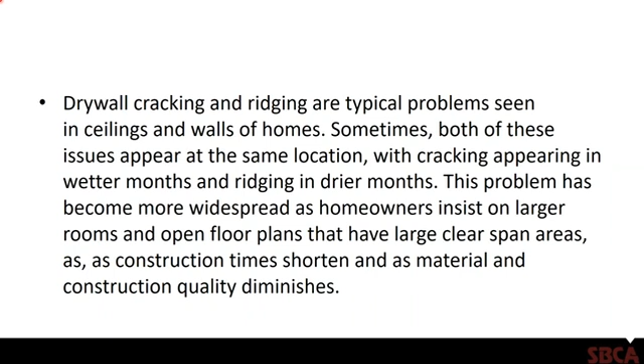Also, to some extent, there's been a decline in the quality of some materials used. In wood, as more plantation-grown wood is used, the effects that moisture has on dimensional stability are significantly greater than with old growth. And also, to some extent, the quality of construction, whether due to ignorance or whatever. So many different factors come into play.

The cracking and ridging are common problems that typically occur along large open spans, and both can occur at the same location, due to alternating periods of primarily high humidity, but also to some extent large shifts in temperature.

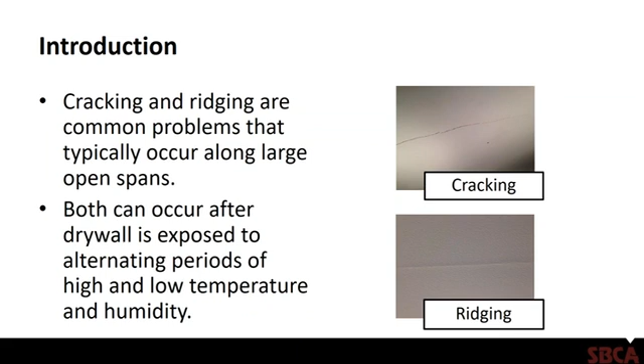Again, we're not going to be discussing gypsum cracking problems typically due to structural deficiencies. The photo on the left shows what you'll typically see if you go out on a job site and see a diagonal crack moving at a 45-degree angle off the corner of a door - that's probably a good indication there's some type of deficiency in the structure, whether it's significant deflection or differential deflection causing that crack.

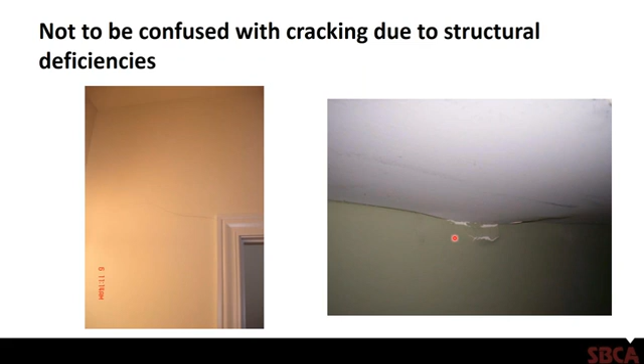The photo at the right is a bearing issue, where a column wasn't installed in the wall where it should have been. Again, structural deficiencies are really not what we're going to be focusing on today.

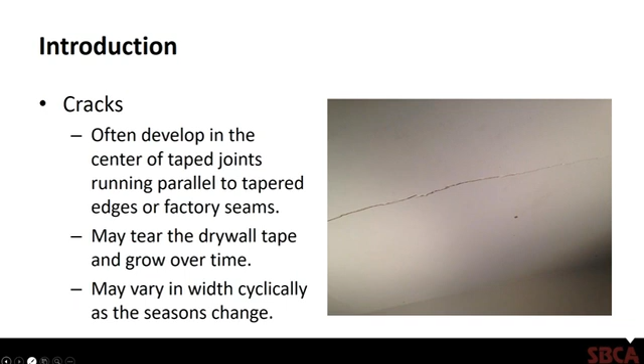Cracks often develop in the center of tape joints running parallel to tapered edges or factory seams. This cracking may tear the drywall tape and grow over time, and it may vary in width cyclically as the seasons change.

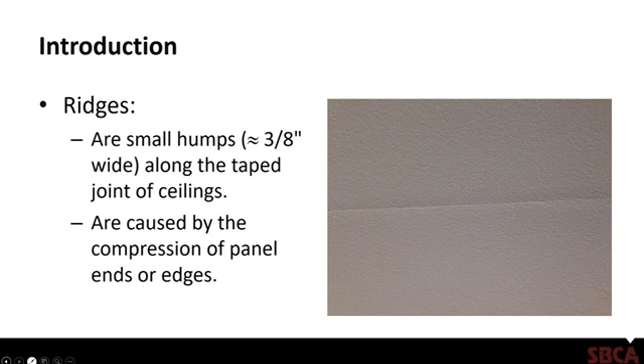Ridges, on the other hand, are typically small humps in the surface of the gypsum, usually a quarter inch to three-eighths inches wide, typically occurring along the tape joints, and are caused by compression of the panel ends or edges.

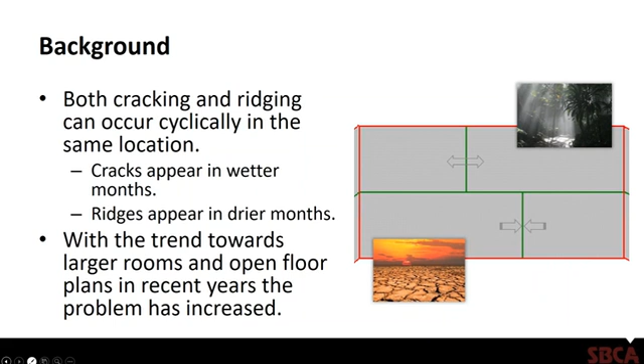Both cracking and ridging can occur cyclically in the same location. Cracks typically tend to show up during wetter periods of time, and ridging typically during the drier months. Again, as we stated earlier, with the trend towards larger rooms and open floor plans in recent years, this problem has tended to increase.

There have been several studies looking into the causes of gypsum ridging and cracking. The first group was sponsored by the Drywall Finishing Council, and they collected data using an electronic monitoring system in two Las Vegas homes. The second group was a joint effort between the Drywall Association of Nevada and Monash University in Melbourne, Australia, where they constructed a framed wall test module, including ceiling and roof structure, within a climate-controlled test chamber, and then varied the temperature and relative humidity over extreme conditions to see the effects.

You'll notice both of these studies were primarily focused on rather arid parts of the United States, and Australia, which also has a large area considered rather arid. The vast majority of reported cases of gypsum ridging and cracking seem to occur in more arid areas of a country, where humidity changes are most drastic from season to season.

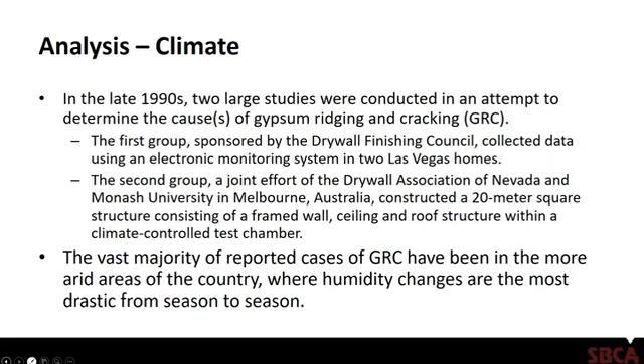The studies basically concluded that significant relative humidity changes are likely the most significant cause of gypsum ridging and cracking, primarily due to differences in behavior of the various construction materials when subjected to cyclical changes in moisture content. Other causes can also include poor framing practices and improper gypsum installation techniques.

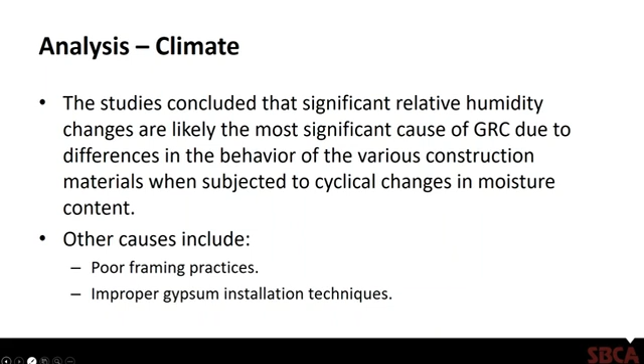In terms of climate, when a residence or building is constructed in the summer, typically at a relatively low relative humidity, and then subjected to an increase in humidity in the wintertime - we're talking about more arid locations, where typically the higher humidity occurs in the wintertime and the lower humidity occurs in the summertime.

Most construction materials are going to take on moisture as the humidity increases, and they will tend to expand. Wood is exactly that way - the framing lumber increases in length to a greater extent than the drywall will. The differences in increased length causes tension in the drywall and can result in pulling the tape joints apart and cracking occurring.

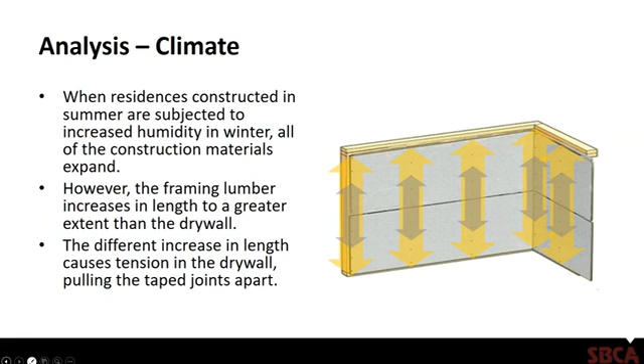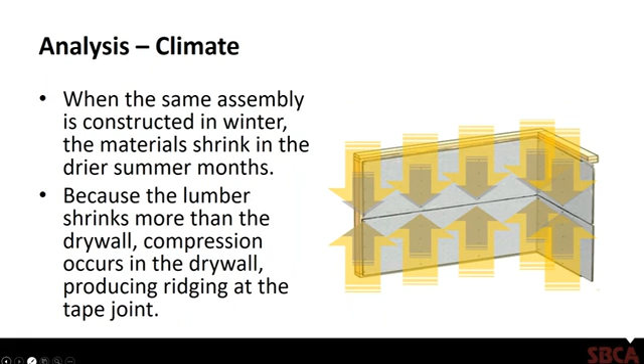The opposite is true when the same assembly is constructed in the wintertime, when the humidity is higher, and then subjected to lower humidity in the summertime and it starts to shrink - again, the lumber shrinks at a greater degree than the drywall. That will force the drywall gaps together, causing the ridging.

Let's talk a little bit about some wood technology as to why moisture effects will change the wood. If we think of wood basically as a series of soda straws - the wood cells - wood is obviously a lot stronger parallel to grain than it is perpendicular to grain.

The chart at the right shows that if these are my soda straws, my wood cells, at moisture contents typically about 30% or greater, like in a living tree, not only are the cell walls saturated with moisture, but you also have free water typically within the cells. Moisture contents can actually exceed 100% in terms of how they're measured. But in a living tree, anything with moisture content greater than 30%, also known as the fiber saturation point, you're going to have free water, and the cell walls of the wood cells are also saturated with water.

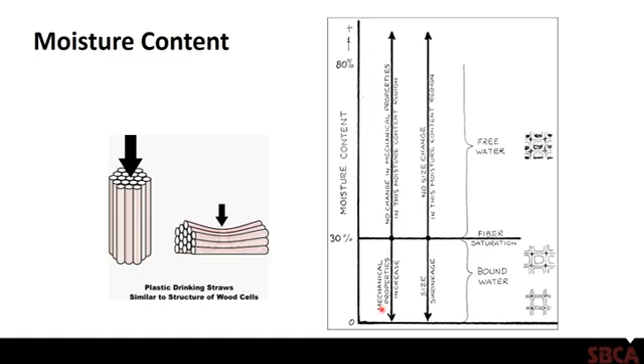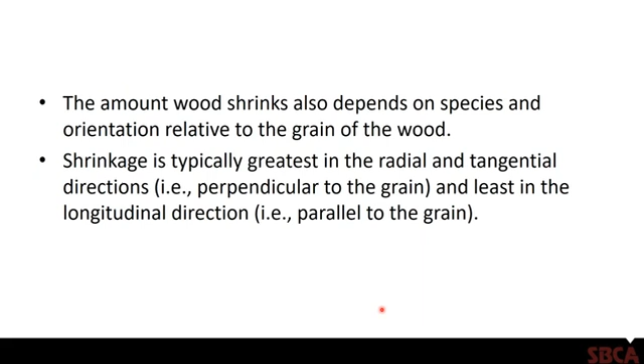Now, the amount the wood shrinks depends on the species being used and also the orientation relative to the grain of the wood. Shrinkage typically is greatest in the radial and tangential directions, or perpendicular to the grain, and is least in the longitudinal direction, or parallel to the grain.

Now, I mentioned a couple of different angles or directions. The radial direction is basically if you start at the pith, which is the center of the tree, and work your way out in the radial direction, so I'm going perpendicular to the growth rings. The tangential direction is basically parallel to the growth rings.

Typically, and again it varies by species, but wood will tend to shrink - its greatest shrinkage occurs in the tangential direction, and that can be anywhere from 5 to 8 or 9% in drying from fiber saturation point down to oven dry, or 0.

In the radial direction, it will also shrink, averaging about 3 to 4 to 5%, going from fiber saturation point, roughly 30%, down to oven dry. And then in the longitudinal direction, which would be in and out of the screen, parallel to the wood fiber orientation, that's where wood shrinks the least.

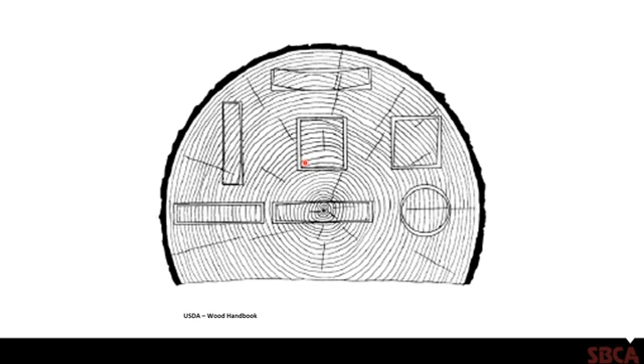When you're manufacturing a truss or buying lumber, you really have no control over how that material is going to get cut out of the log. So you don't know if you've got a radial or tangential cut, or how much of each you're going to have in that piece.

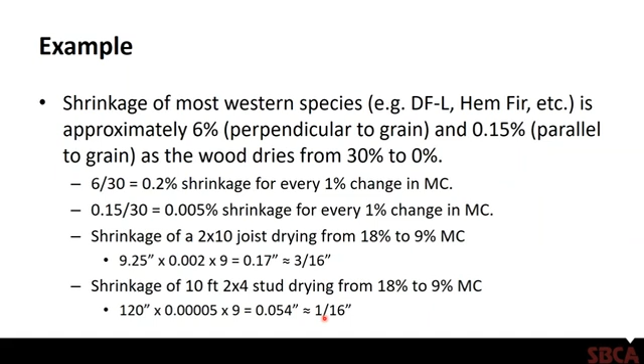As I said earlier, studies basically showed that humidity levels have probably the most significant effect on when gypsum ridging and cracking can occur. However, typically the humidity levels must change by at least 50% and be maintained for 18 to 30 days for gypsum ridging and cracking issues to occur.

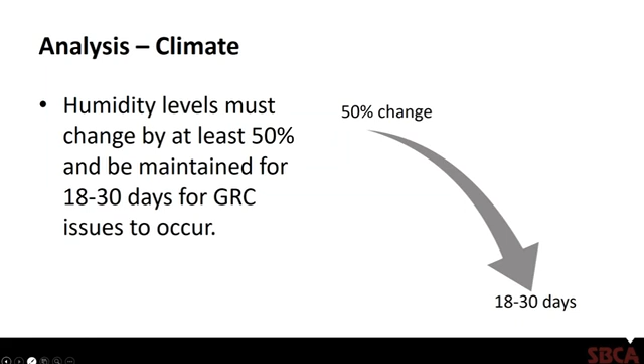What you're seeing here is humidity changes 50% and then is maintained for an 18 to 30 day period. So the relative humidity is changing, and as a result, the moisture content and the equilibrium moisture content of the wood takes time to either expel moisture or take it on, depending upon if the relative humidity is going down or up by 50%. It just takes time for things to start to move and change. So again, relative humidity change of about 50% or greater, maintained over an 18 to 30-day period.

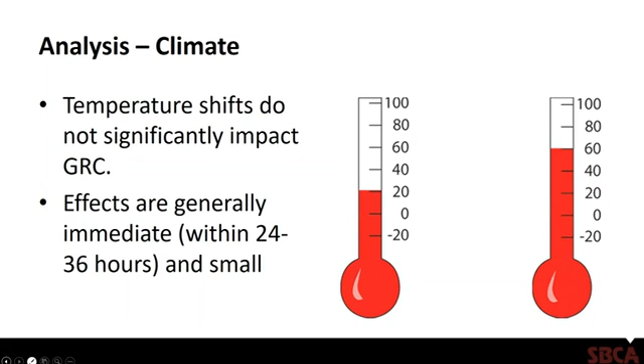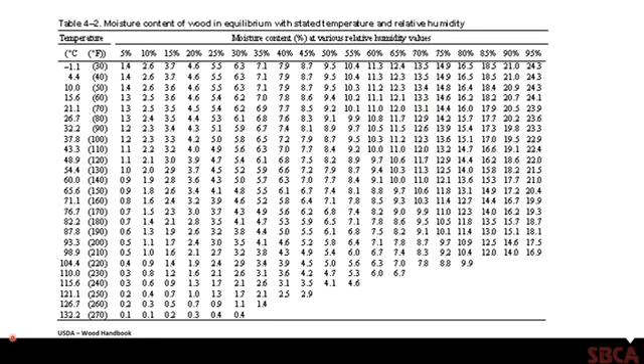However, if I go from a relative humidity of say 20, and have a 50% change, going up to 70, and maintain that over a long period of time, with temperature basically at 70 degrees, I'm going from 4.5% up to 13.1%—so a more significant change with changes in relative humidity.

Other factors that can affect gypsum cracking: in certain parts of the country it's not uncommon to use unseasoned or wet lumber. The reason is that in more arid conditions, the thought process is by the time the lumber gets installed and the building is finished off, the moisture content of that wood is probably going to be down well below 19%. But as we've seen, as that wood shrinks while it dries, that's when you get the more significant dimensional changes.

You can also have misaligned studs and headers around doors and windows. Joints should fit tightly, because as the structure is loaded, any gaps occurring in the framing are basically going to be taken out, and that can cause ridging in the gypsum.

Headers should fit tight against the top plate of the wall or cripple studs above the header. So again, just doing a good job of framing can certainly help mitigate some of these problems.

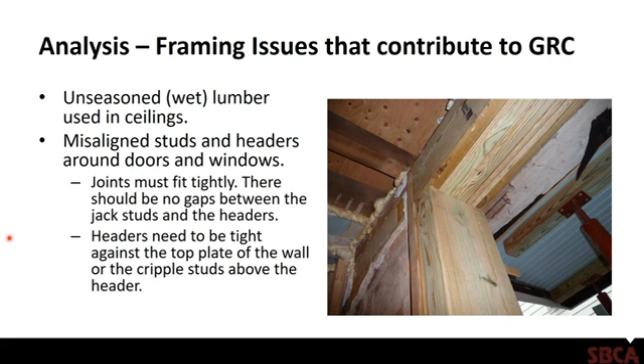Gaps between wall top plates due to improper attachment can cause problems, as can gaps between studs and plates. If you're not using a pre-trimmed stud and you have varying stud lengths by a little bit, that creates unevenness in your wall, which can cause problems.

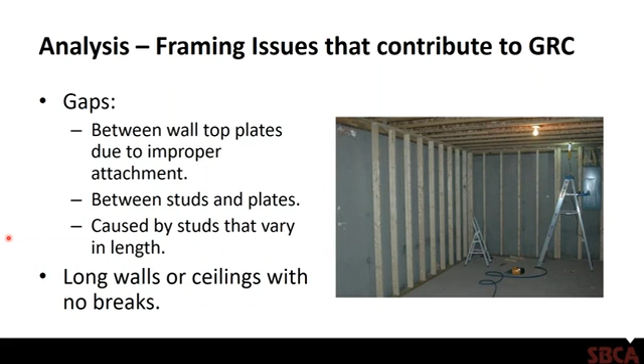Long walls or ceilings with no breaks can also cause problems, because typically gypsum is going to require having some type of expansion joint put in—we'll talk about that shortly in terms of the requirements from the Gypsum Association.

Other framing issues that can contribute to gypsum ridging and cracking would be crooked framing members. Often if the member is bowed or twisted to a certain extent, the installer trying to attach the drywall ends up missing some of the fasteners, and that can cause problems.

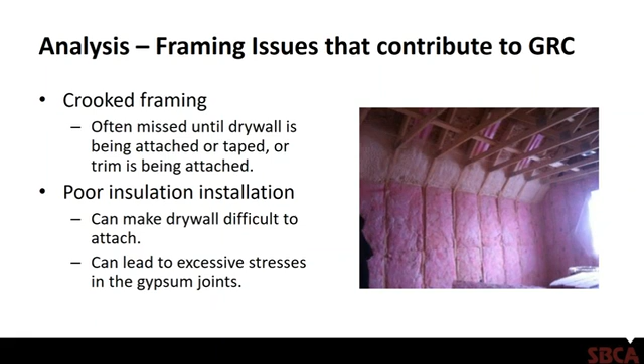Poor insulation installation can make drywall very difficult to attach and can lead to excessive stresses in the gypsum joints.

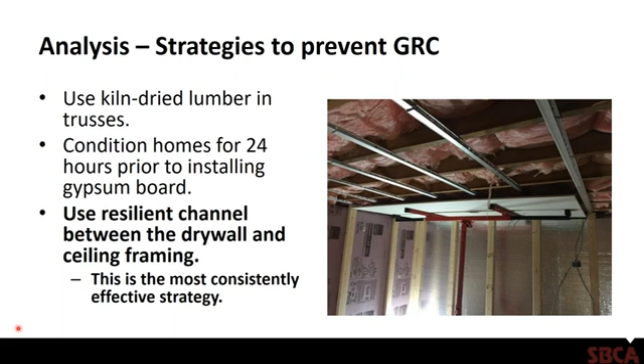What can help prevent gypsum ridging and cracking is using kiln-dried lumber in trusses, which I'm sure most everybody on this call is doing, and also conditioning the building for at least 24 hours prior to installing the gypsum board. The studies also found that using resilient channel between the gypsum board and the ceiling framing can also significantly reduce GRC.

Now, the Gypsum Association in their construction handbook, Chapter 2, has allowable deflection criteria that needs to be considered to make sure the gypsum doesn't exceed, and the framing materials it's attached to don't exceed, their deflection limits. For drywall assemblies, L/240 is typically desirable, with a limit of L/120 and L/180 in some codes. For veneered assemblies, it's L/360 with a limit of L/240.

Also make sure the structure is designed for minimum lateral loading, which for interior partitions is 5 pounds per square foot, typically a requirement in the building code. Exterior walls can vary, but that can be as much as 45 pounds per square foot or greater depending on the height and geographic location.

So again, making sure the framing and structural aspects are stiff enough so that you don't exceed these limitations, and also making sure the gypsum is properly selected so that it itself is stiff enough between its supports to not exceed the deflection limits.

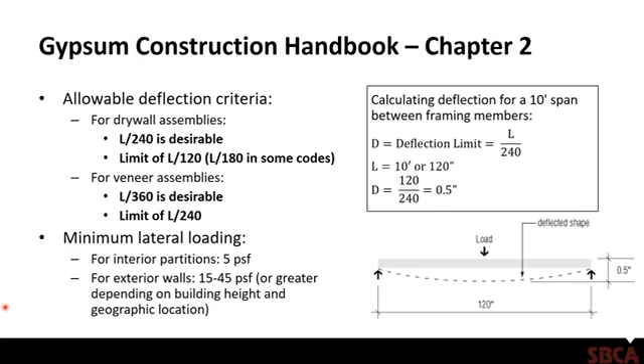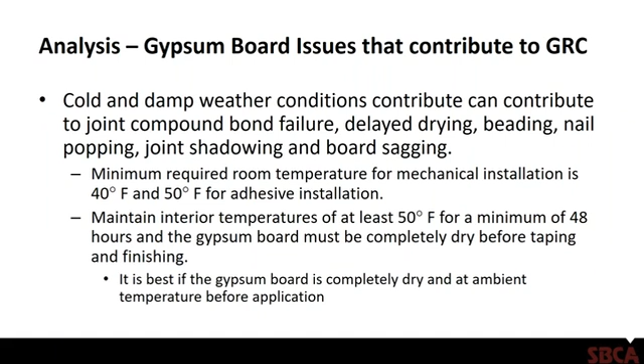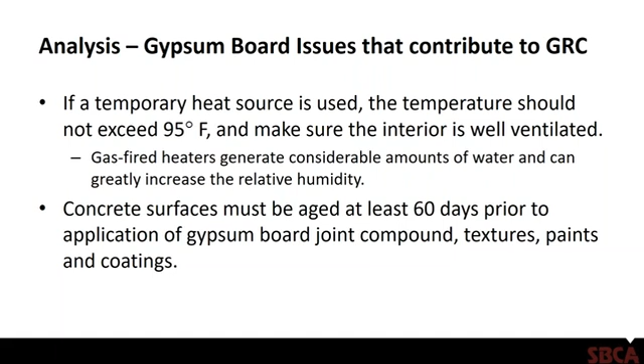Concrete surfaces should also be aged at least 60 days prior to application of gypsum board joint compound, textures, paints, and coatings.

The drywall attachment should also proceed from the center of the panel to the ends and edges. Drywall must not be attached to the corners first and then left to hang prior to the field being attached.

Control joints in interior ceilings without perimeter relief must be installed so that the linear dimensions do not exceed 30 feet, and the total area between control joints does not exceed 900 square feet.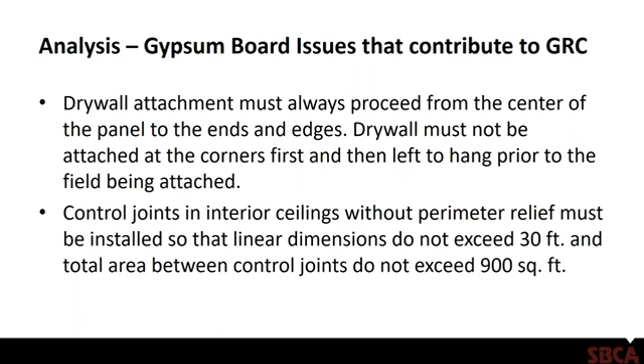This is not going to get you into problems with some of the smaller houses, but certainly some of the larger homes that have huge great rooms. This is an issue, or requirement, that's often overlooked.

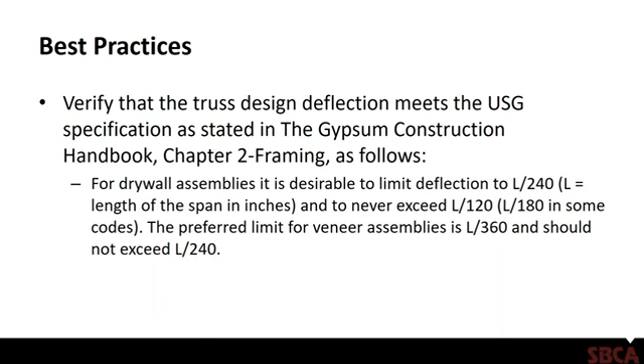Best practices from a component manufacturing standpoint, in terms of providing guidance to customers, would be to first verify that the truss design deflection meets the U.S. Gypsum specification as stated in their Chapter 2 handbook, meeting the deflection criteria: limit the deflection to L over 240 and never exceed L over 120. The preferred limit for veneer assemblies is L over 360 and should not exceed L over 240.

You also want to verify that the trusses are level and the ceiling plane is flat by measuring the various locations using a laser level.

Gypsum installation should occur only after the framing techniques are of sufficient quality to avoid unacceptable movement in the framing members. If the trusses are not level, it's recommended that they do not attempt to stiffen or alter the trusses without getting approval from either the building designer, modified details from the truss designer, or the truss manufacturer.

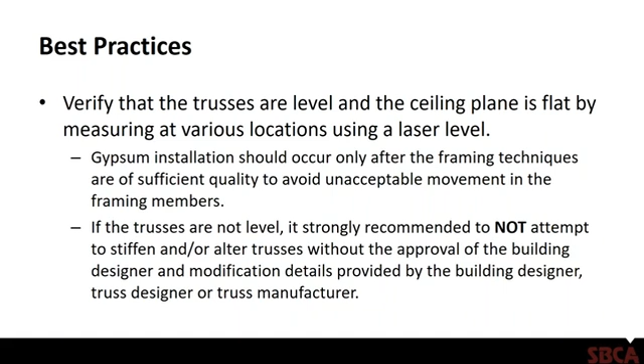The drywall contractor should document the following items as stated in the U.S. Gypsum Construction Handbook regarding drywall installation: the date, time, and temperature and humidity at the time of drywall application; the method and how long the structure was conditioned prior to installation; if ventilated, the method of ventilation; the type of joint compounds used; and the type of finish specified and what was implemented.

By doing this, at least they've got information that they can use if a problem occurs later on. They can show that they've been following the requirements of the Gypsum Association and U.S. Gypsum.

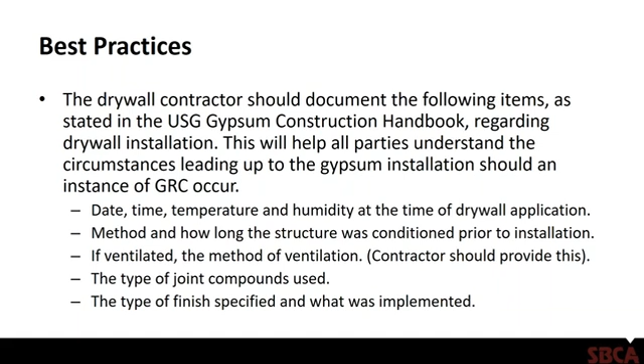It's important, as stated earlier, to allow materials to condition at the site prior to installation, and allow materials to condition for 48 hours prior to joint taping.

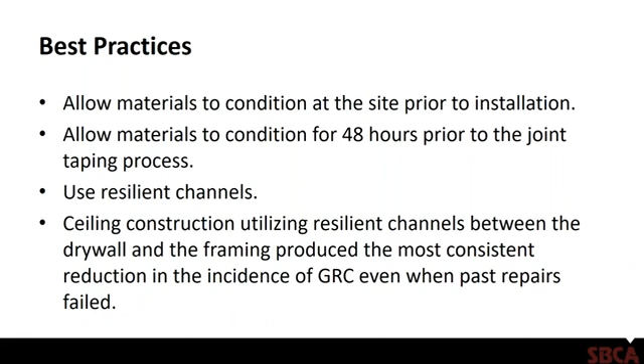Use of resilient channels can certainly help reduce GRC. Backblocking the gypsum board joints is typically more expensive to do, however it does help in terms of reducing callbacks and dissatisfied customers.

Prior to installation, again, inspect the framing to eliminate as much as possible gaps between the framing members that could affect the wallboard installation process and cause problems later on as you get settling in the structure as loads are applied, again causing ridging or cracking in some instances.

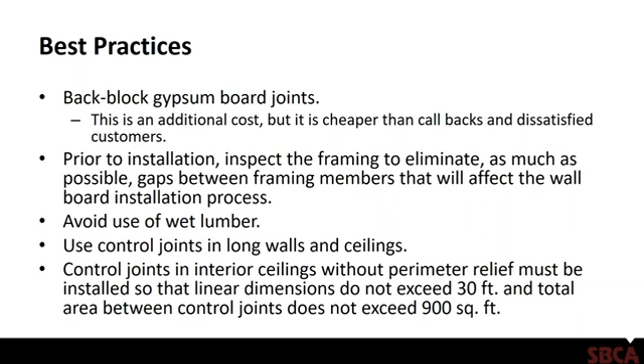Should avoid using wet lumber, and then use control joints in long walls and ceilings, again with linear dimension not to exceed 30 feet, and total area between control joints not to exceed 900 square feet.

There are several good resources that you can go to: the Gypsum Association, Drywall Finishing Council, and then DrJ's best practices, which you'll find on the website.

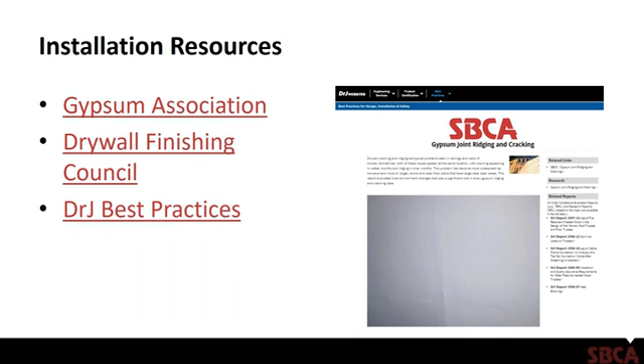You'll find a link to that on the website for the Structural Building Components Association. There's also several good references from the Gypsum Association or the Drywall Finishing Council, and this slide shows that link.

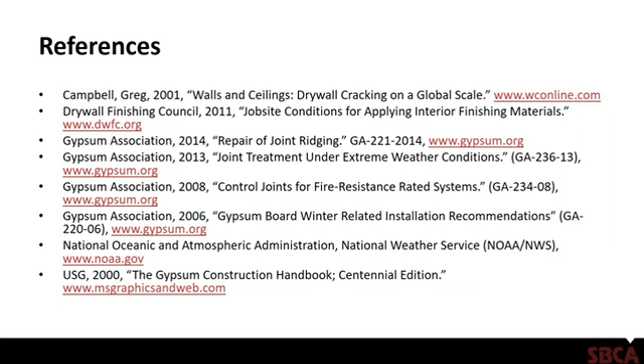Another cause of gypsum cracking that you'll typically run into—most of the calls we get are from the northern parts of the United States, cold weather areas—is what the industry refers to as partition separation.

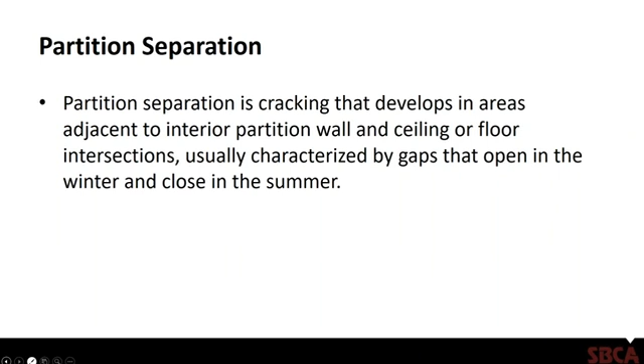So partition separation, as our industry defines it—the metal plate connected, or structural building component industry—is cracking that develops in areas typically adjacent to interior partition walls. It can occur either at the ceiling or floor level, usually characterized by gaps that open in the winter and close in the summer, so it's cyclical.

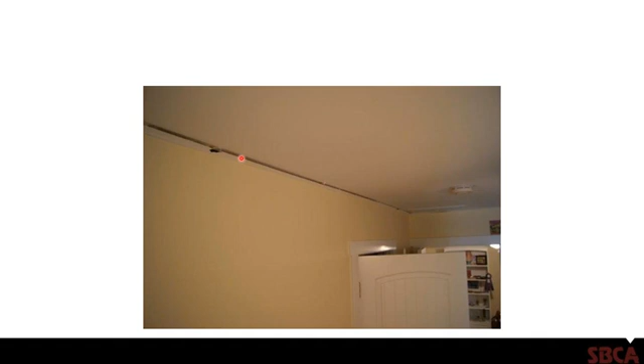Here's a prime example of what partition separation can look like. We have an interior partition, and trusses in this case spanning across that partition. A gap has occurred between the ceiling level and the top of the wall. That's typically seasonal—worst case is usually in the wintertime, and then in the summertime it may go away and come back the following year, continuing unless the cause is determined and corrected.

There are many causes of partition separation. They can either be acting independently or combined as a group.

One cause can be building settlement—footings either improperly sized for the given soil capacity, or too shallow and subject to freezing and thawing cycles, causing movement in the footings. Footings can also be near seasonally fluctuating water tables. Certain parts of the country have very expansive soils that, without proper techniques, can cause problems with movement in the footings. So building settlement is one thing that can certainly cause partition separation.

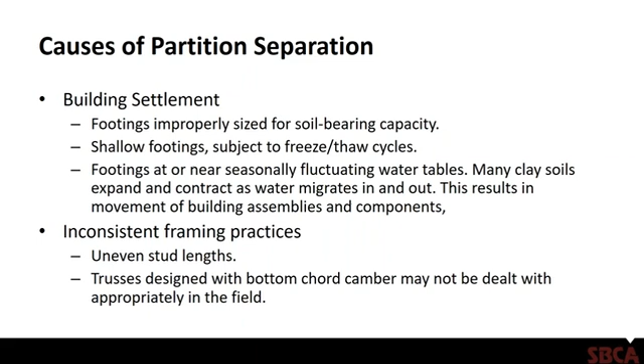You can also have inconsistent framing practices, uneven stud lengths. Trusses can be designed with bottom chord camber which perhaps is not correctly dealt with in the field—that can cause problems. Moisture effects can also cause partition separation issues.

Individual wood members used in typical platform frame structures shrink and swell significantly on a seasonal basis due to changes in moisture content. I might add, typically when we're talking about moisture content there, it's really more of a ventilation issue where things are not being vented properly.

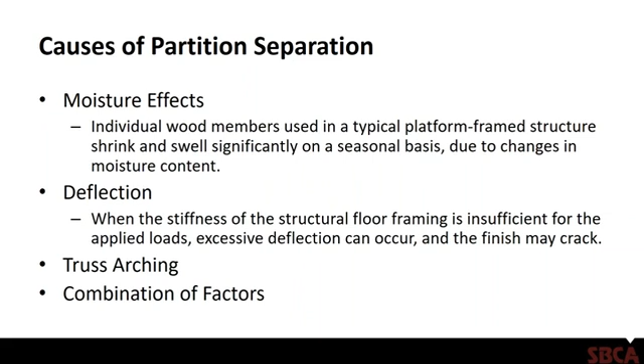Sometimes deflection issues or under-design from a deflection standpoint can cause problems where you've got differences in the deflection of various materials. Truss arching is typically what's blamed, especially if you're getting a call where someone's got a truss arching problem. And it can also be a combination of any of these factors.

Truss arching is typically a movement due to significant differences in moisture content between the top and bottom chords of the trusses. Arching is typically not associated with any structural problems.

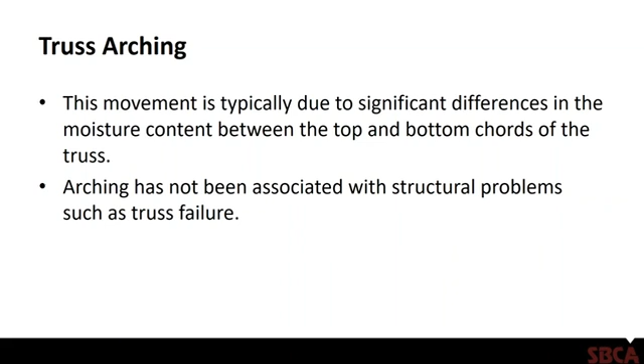With a typical roof truss, in cold weather climates the bottom chord typically has insulation and is encapsulated in it, while the top chord is typically exposed. If your ventilation is not adequate, or there are sources of high moisture—kitchen vent fans, bathroom vent fans—venting into the attic space and not properly venting out to the exterior, what can happen in the wintertime is you get this warm, moist air working its way up into the attic space, condensing on the top chords of the trusses, just like putting a soaker hose on that truss. So the top chord's moisture content increases, and as wood takes on moisture, it wants to expand.

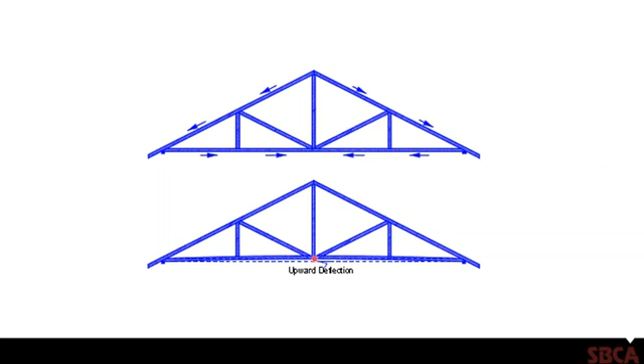The bottom chord, which is in the insulation and close to the finished, warm area of the house, typically stays at a much more controlled moisture content—or if it's drying out, it could be shrinking, pulling the other way. What you end up with is this arching effect where the truss literally arches, and if there's an interior wall in this area that's not connected properly, you can end up with a gap occurring between the bottom chord of the truss and the top of the wall.

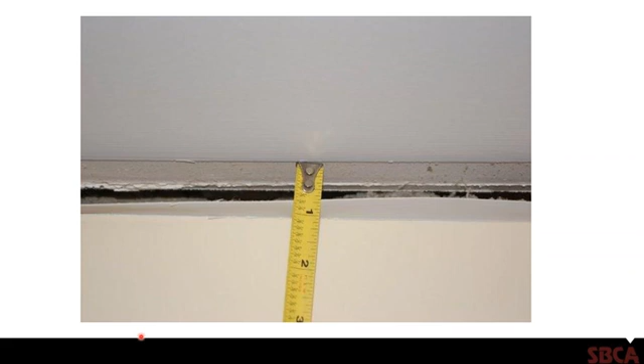Classic example here, in this case it can be pretty significant. You're talking about a 3/4 inch gap that has occurred between the ceiling level, as the gypsum ceiling has gone with the truss and separated from the gypsum wall at the top of the wall.

You can also have it occur. There's a question from the audience: how does spray foam affect moisture content?

That's a real good question. If you're aware of any issues that have come up using spray foam, please give us a call. We have a form available that we'd like people to fill out, so we can get a better idea of what some of the problems are. We're aware of some of the problems, but...

You've got different types of foams. You've got more of an open cell foam, which is supposed to allow the moisture to move more freely. You've got closed cell, which can encapsulate. There have been issues. Spray foam is used in a lot of applications, it's become pretty popular.

I personally have not received many calls. Probably the last time I took a call regarding a spray foam or truss arching issue, or partition separation issue where spray foam was used, was about a year and a half ago now. But if you're getting those types of calls, please give me a call, because we're trying to set up a database to better understand what some of the issues are. But yeah, it can occur with spray foam as well.

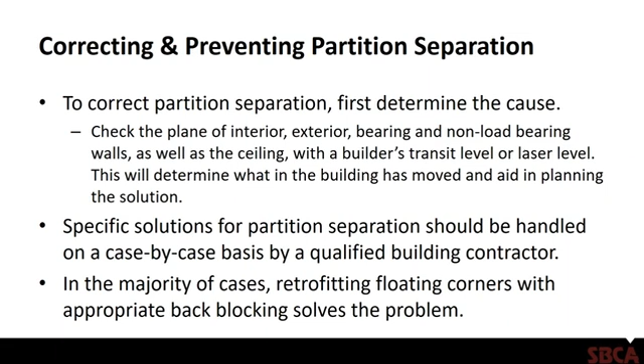And in every case, it's been that they had added some insulation to improve the thermal properties of their home and the energy efficiency, and next thing you know, they've got a problem. So it's not necessarily a new construction problem. What are some ways that you can go ahead and solve the problem?

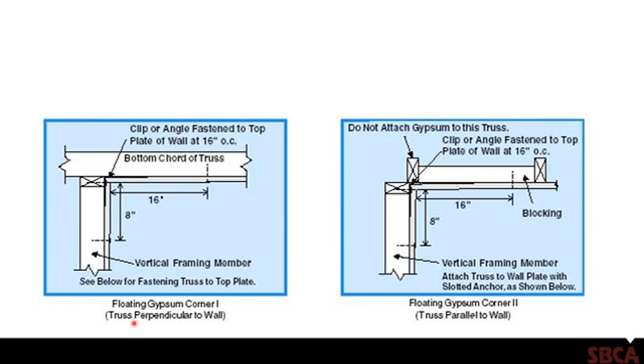There are also other ways this can be done. During construction, or even as a retrofit, if it's a 2x4 partition wall, you can add a 2x6 plate centered on the wall, and attach the gypsum to the plate but not to the truss. So now when the truss wants to move, it's basically moving in the notch between the 2x6 blocking on either side of it, but it's not taking the gypsum sheathing up with it, at least at this point.

Again, you're floating, or holding the closest fastener into the bottom chord of the truss at 16 inches from the corner.

I see somebody commented that they've had drywall installers act like this is new information. The one thing I want to caution you on, these are recommendations from the Structural Building Components Association. You need to be careful if you're in a commercial project where you have to have a fire-rated assembly. Certain fire-rated assemblies have very specific fastener attachment requirements, and you won't find any of them that have been tested using a 16-inch floating corner. This option should still basically work, however, since you're still attaching along the perimeter, but just be aware that certain fire-rated assemblies have very specific fastener attachment requirements.